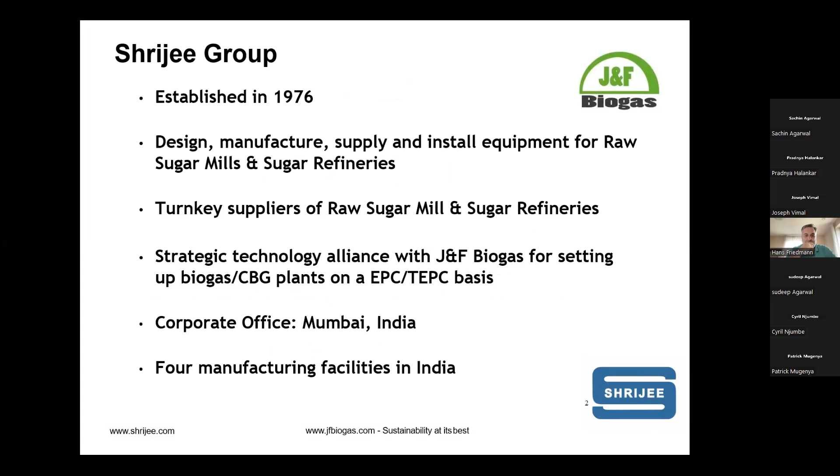So I would just give a short agenda of this presentation, like what would be the kind of this presentation flow, just to give you an idea of what we'll be discussing today. So we would start with the basic introduction about what J&F is offering in terms of technology, and also a little bit more to keep it very simple on the basics of biogas.

For example, starting with the Satat scheme. Satat scheme is something which has been introduced into India for setting up these biogas plants by entrepreneurs and sugar mills. So I'll go through some details on the Satat scheme, and also what are the different feedstocks which can be used from the sugar industry and the non-sugar industry for setting up these biogas plants, and also a little bit on the gas yields, what would be the gas yields from different feedstocks.

And also on different components which are in biogas, because biogas in India is not something new, but we have not had many industrial scale biogas plants. We had small gobar gas biogas plants in India in the past 40, 50 years, but to scale it up to an industrial scale, there are different sets of components and skills needed when setting up this biogas plant. So I would also go through these different components in the biogas plants and what are the technologies involved in this and so on.

So first, I would start briefly by giving a short presentation on the technology, what we are offering here in cooperation with Shrijee here in India. So we call it something called a semi-dry fermentation technology.

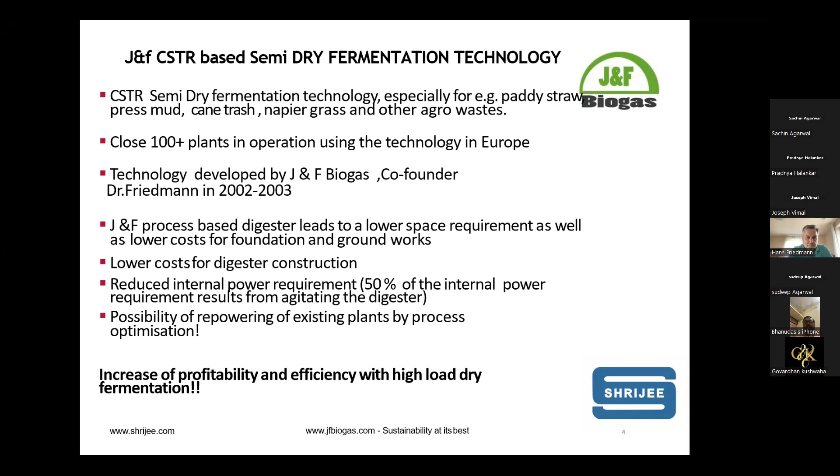So I would not go much into the technology part for now. I would move on to more practical issues, what is currently available in the market in terms of the scheme. The Satat scheme, as some of you would have known, stands for Sustainable Alternative Towards Affordable Transport. This was launched by the Indian government back in 2017-2018, and with some amendments it has been reintroduced in the current year, 2022, with the central finance reintroduced. This was the scheme which the Indian government introduced for entrepreneurs and sugar mills to set up compressed biogas plants, where investors or operators can set up these biogas plants and sell the biogas or CBG to the oil marketing companies.

There is something called central financial assistance, or CFA, for setting up these biogas plants. I'm just giving an idea of what the scheme is and what the advantages or contents of this specific scheme are. If there is a sugar mill, an investor, an independent operator, or an energy company who wants to set up a biogas plant, the central government via its responsible agencies is offering close to 4 crore Indian rupees for setting up a plant with 4.8 tons output of CBG, or 4,800 kg. In terms of press mud, the size of the plant would roughly be 125 tons of input press mud capacity per day, which produces around 4,800 kgs of CBG, for about 4 crore Indian rupees.

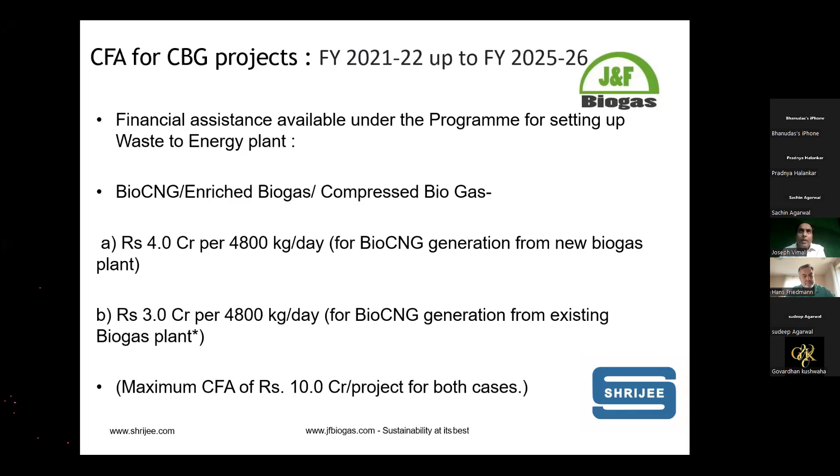When it comes to existing biogas plants where you can generate biogas and convert that into CBG, they are giving around 3 crore Indian rupees for setting up such plants. The maximum central finance currently available in India is around 10 crore Indian rupees, that's around 1.3 million US dollars, for our international participants to know. I'm sure other countries also have similar biogas policies with central financial assistance that can be used for setting up these plants.

When it comes to gas offtake, that's one of the important things - once you set up a biogas plant, how do you sell the gas generated? Most of us in the sugar industry are used to ethanol being sold or taken by oil marketing companies. So the government has made a provision where oil marketing companies would be involved in buying the gas from producers of CBG, whether it's a sugar mill or independent operators. They set up a pricing slab for buying at different prices based on the nearest CBG, or let's say CNG, station. So they benchmark the CBG price against the CNG station price.

CNG, compressed natural gas stations, are quite common in most parts of North India, like UP, Delhi, and Haryana, and now it's getting more popular in the South as well, where a lot of gas pipelines are being set up. So the government has benchmarked the sales price against the sales price of CNG. You can see that the base price, including GST, is around 56.7 Indian rupees for sale offtake of this gas.

Depending on the CNG price, as I said earlier, the price kind of increases. The formula is that roughly they are offering 20% lesser than what is there at the nearest CNG station. There is also pricing offered based on distance - if the CBG plant is far from the sale point, there's pricing based on this specific criteria as well. This is something the government has reintroduced with refinements to encourage more entrepreneurs to set up these plants in 2022, and all interested investors should make use of it, because as of today this exists - the subsidies would exist until 2025-26. So the first movers in the market would be able to take advantage of this specific assistance.

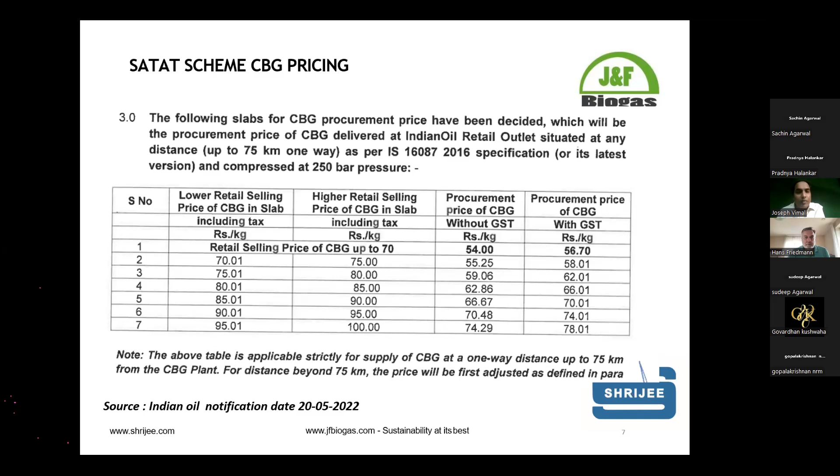Next, I would briefly go through the different feedstocks which are used for biogas, like cane leaves, paddy straw, pressed mud, napier grass, and bagasse.

These are common feedstocks available. Of course, each feedstock has its own characteristics when it comes to digestion. They have their own gas yields, and their own type of characteristics which give the corresponding gas yields.

In the sugar industry context, cane leaves and pressed mud can be used, and bagasse can also be digested, but bagasse is slightly more challenging compared to pressed mud or cane leaves because of its lignin content. So the low-hanging fruit in the sugar industry would be pressed mud, and cane leaves are also something which can be explored, since a lot of cane leaves are left behind in the fields post-harvesting.

And paddy straw is something, as we all know, that in India causes a lot of pollution issues in Punjab, Delhi, and Haryana regions during harvesting time at the end of the year, in November and December. So paddy straw is also being used as an interesting feedstock currently by many investors who are setting up large-scale biogas plants.

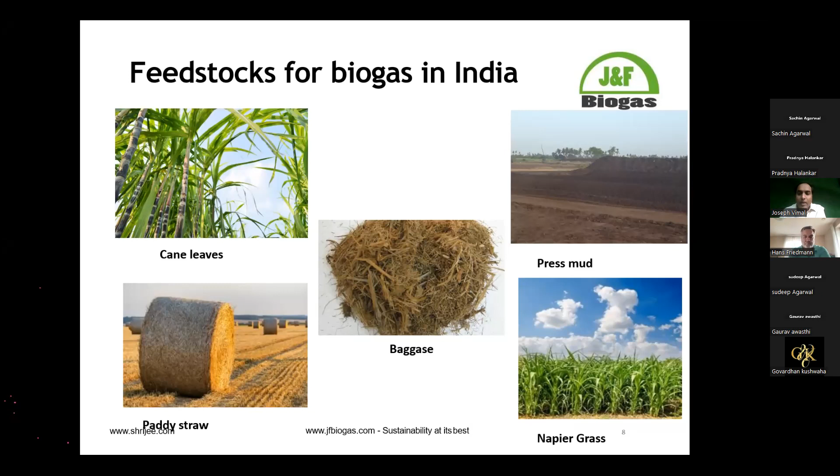So now I would just jump into explaining a very basic anaerobic digestion process. How does the process work? Most of us know how the process works, but just for the audience who are perhaps new to biogas, let's go through how digestion happens and what end products are obtained post-digestion.

So any organic matter, depending upon its nature, can be used for digestion purposes to generate biogas. So livestock, cattle dung, energy crops, waste from STP sewage plants, hotel and restaurant waste, supermarket waste - of course the industrial waste we are discussing today would be more on pressed mud and cane leaves. And different kinds of energy crops and other substrates can also be used.

So even co-digestion can be made in a single digester. But the most important first step is to understand each feedstock and analyze its characteristics - what are the characteristics in terms of dry matter, organic dry matter, digestion capacity, and so on.

So digestion is basically a fermentation process. It has, of course, in industrial scale, many mechanical components like agitators, mixers, heating systems, and other components involved in an anaerobic digestion process. We will go through some of these components in detail at a later part of this presentation.

So the gas generated - raw biogas - has a methane percentage around 50 to 55%. It depends upon the feedstock, and each feedstock has a specific biogas yield. Then there's CO2 and other components. So based on the requirement, if you're generating heat for thermal applications, or using it for electricity generation, or in our case, in the Indian context, biomethane is a more interesting aspect currently being used. And it can also be injected into the gas grid.

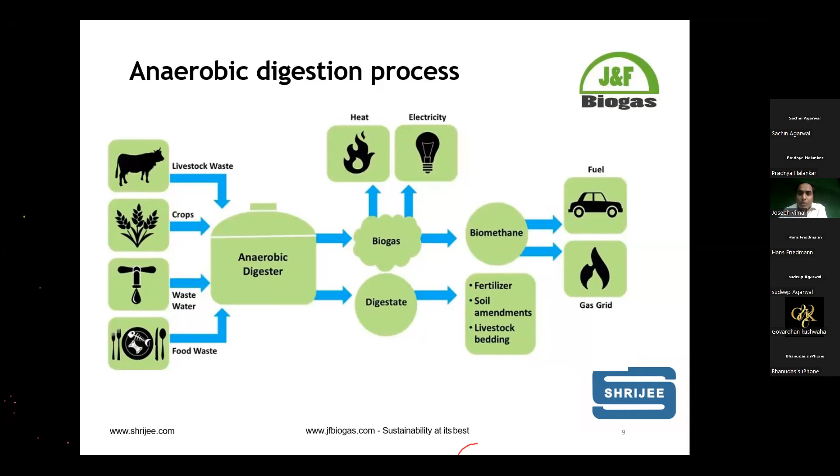Even if you take pressed mud, there are different quality pressed mud analyses we have come across in India and also in other countries. So it's very important - the first thing is to do standard testing of the characteristics, followed perhaps by a biomethane potential test, to determine the exact biogas yield before starting a biogas plant.

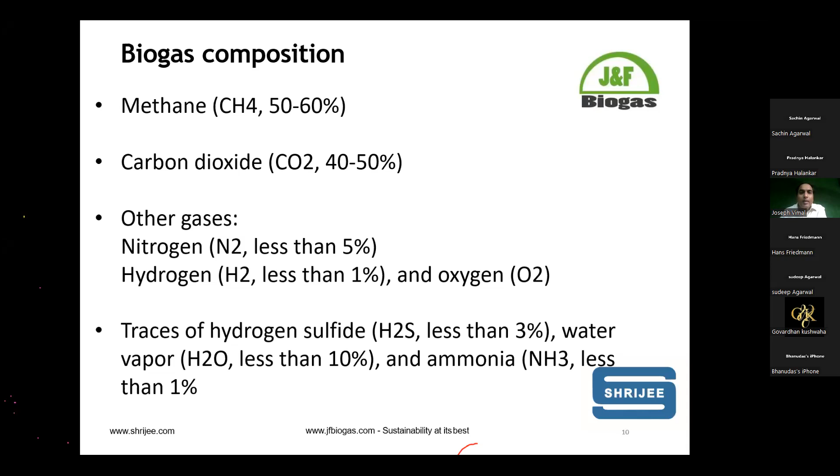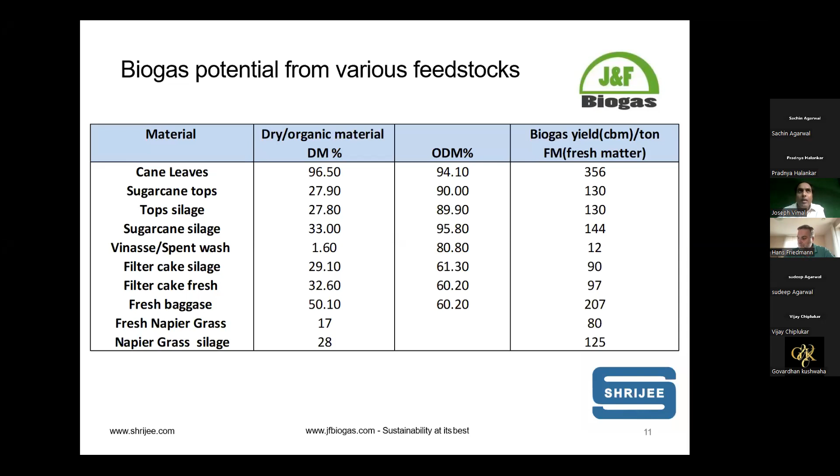And then filter cake, fresh filter cake and filter cake silage also has been tested, and you can see the gas yields here, and what are the different gas yields being used here. We have also tested bagasse under Brazilian conditions, and most of the numbers here we have also worked on with Indian numbers. In Brazil, some sugar mills are a little less efficient, so the gas yield is slightly lower, because when the sugar mills are less efficient, the gas yield also changes correspondingly.

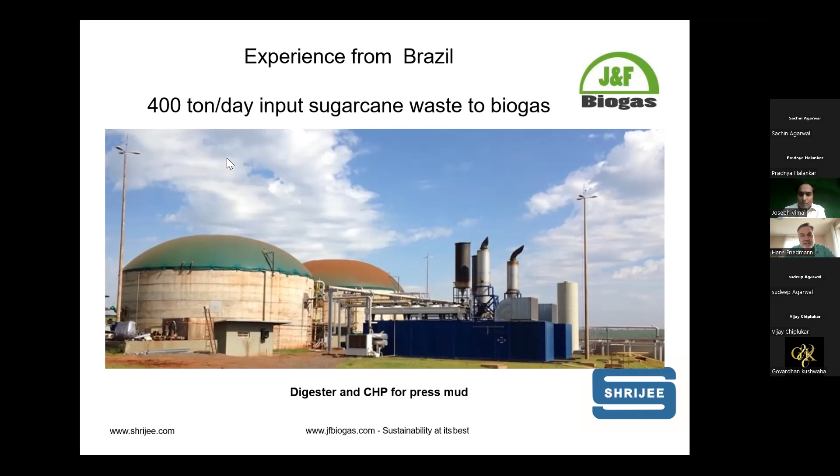Could you take the next slide? We tested the filter cake, the press mud — in Brazil it's called torta. We made some tests with bagasse, with vinasse, with cane leaves, and even with a mixture of these feedstocks in this wet digestion plant. To be honest, the mixture failed. It was very difficult to handle all these different materials on account of the difficult viscosity in the digester.

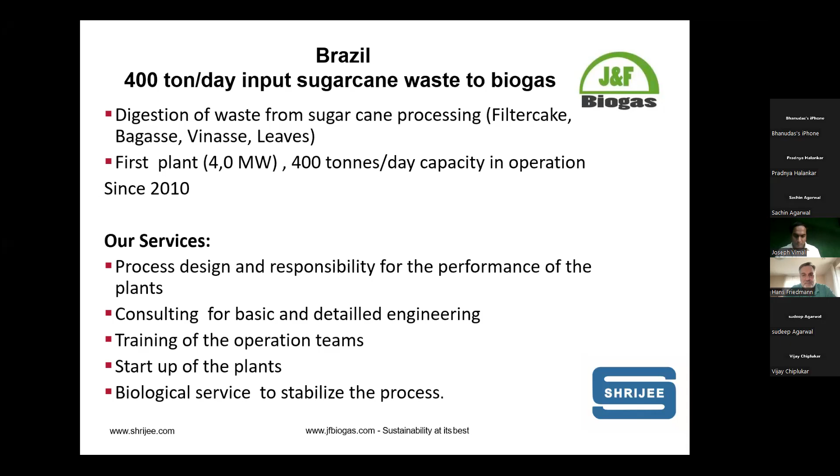We made the design of the plant, of the process. My job was to train the team in the operation of the plant and to help in the startup and the biological service of that biogas process. One point was that the process needs micronutrients to work in a stable way, for example. Next slide.

Joseph, would you like to go on? Okay, sorry, it was on mute.

So the next slide would be on the co-digestion of sugarcane industry waste, because we always have so many questions in the Indian sugar mills about what would be the combination, what kind of feedstocks can be used for co-digestion as well. Based on the past experience and also looking at the feedstock analysis, substrates like press mud and cane leaves can be co-digested, because these are more on the dry matter side — for example, press mud is more than 25% and cane leaves also on the higher side. So these are both, you can technically term them as solid feedstocks, and the solid feedstocks can be used together.

We also see many cases where there are common inquiries on how press mud and spent wash can be co-digested together, what would be the process, what would be the end result, and so on. So our experience, mainly from Brazil on the technical part, is that it is feasible to mix press mud and the vinasse, or the spent wash as we call it in India, considering the gas generation and all those factors.

In the Indian context, one of the challenges is mixing press mud and spent wash. There are certain pollution control norms for disposal of spent wash, and as we know from the sugar industry, the pollution control board is very stringent about spent wash disposal, even from the distillery. Once you combine this, there are regulations and disposal guidelines which have to be followed, so that is one thing to be addressed.

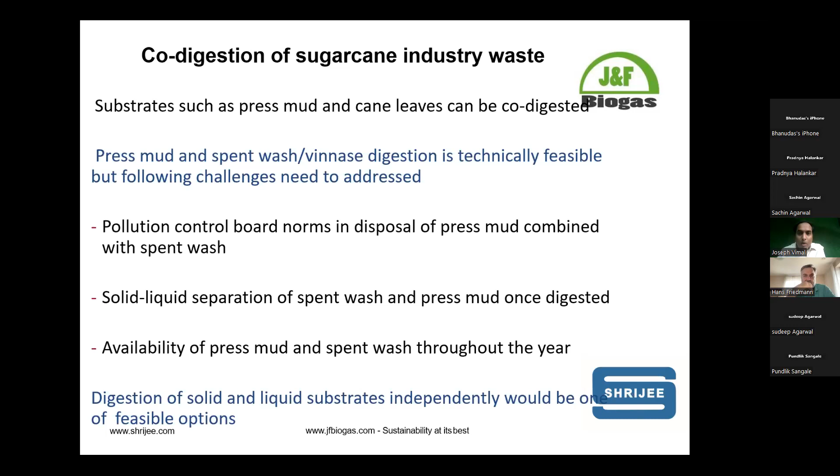We don't mix it with water and pump it into the digester in a specific ratio. In our specific process, we prefer to take the press mud directly into the feeding system in solid form and then into the digester. The digester has a gas holder on top for gas collection, and it also has agitators inside, which we'll show in following slides. Then we have other components like instrumentation, electrical, and everything else, which comes as part of the package.

Post digestion, we have the digestate, which comes out as organic manure. The raw gas typically has hydrogen sulfide and CO2 present. So for making CBG, compressed biogas with high purity methane, we need to remove the hydrogen sulfide. The hydrogen sulfide in press mud varies depending on whether the sugar mill uses a sulfitation or non-sulfitation process—it can range anywhere between 500 to 5,000 ppm.

Based on the characteristics of that specific mill, a suitable hydrogen sulfide removal system can be designed. Then you have a CO2 scrubbing system following the hydrogen sulfide removal, because hydrogen sulfide is highly corrosive, so we need to remove it before the CO2 scrubbing system. There are about 4 to 5 different technologies which can be used for CO2 scrubbing—we'll go through this briefly in a following slide.

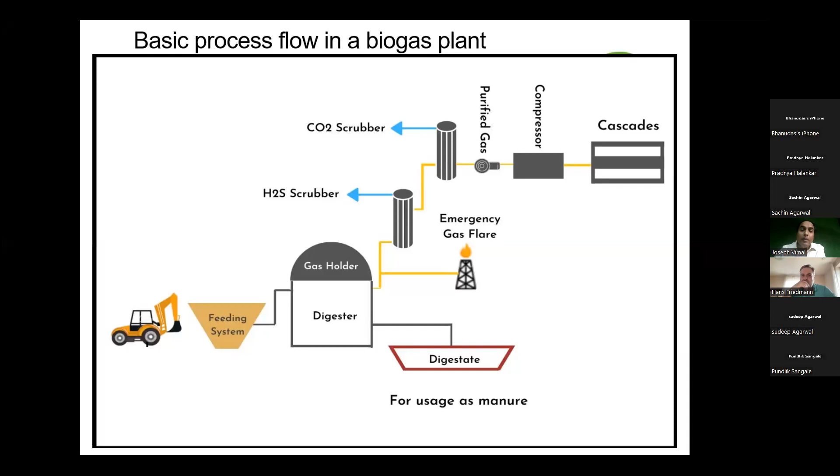The next slide is very important because we get questions on this: our sugar mill runs only for 120 to 250 days. How do we operate the plant? The sugar mill crushing season typically varies between 120 to 250 days across the world, just as an average number. But biogas plants need to be operated for 365 days in a year, starting from the season until the end of the season and during the off-season as well. This is a continuous biological process, which means the biogas plant has to be operated year-round.

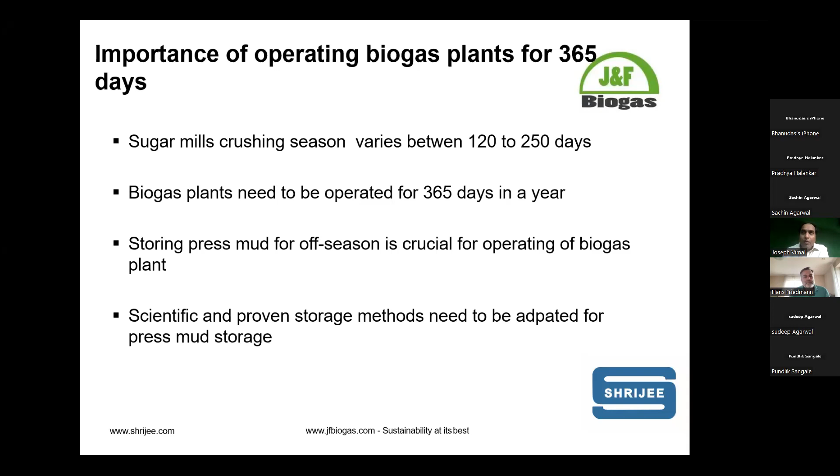So it's very important to store the press mud for off-season operations. We get questions on how do we store press mud, and how can it be stored?

What you see here is a press mud storage yard from Brazil, used for storing the press mud. Here you see different compartments or bunkers with partition walls, and the press mud is compressed using small tractors and vehicles for compacting it, so no reaction happens. Before setting up a biogas plant using press mud, a storage yard is one of the important key infrastructure pieces one should have. It's an additional investment, but it's an investment for the lifetime of the plant, 20-25 years. The storage yard is typically made with an RCC base, or asphalt can also be used depending upon the feedstocks. The right storage method is very important for maintaining the gas yields.

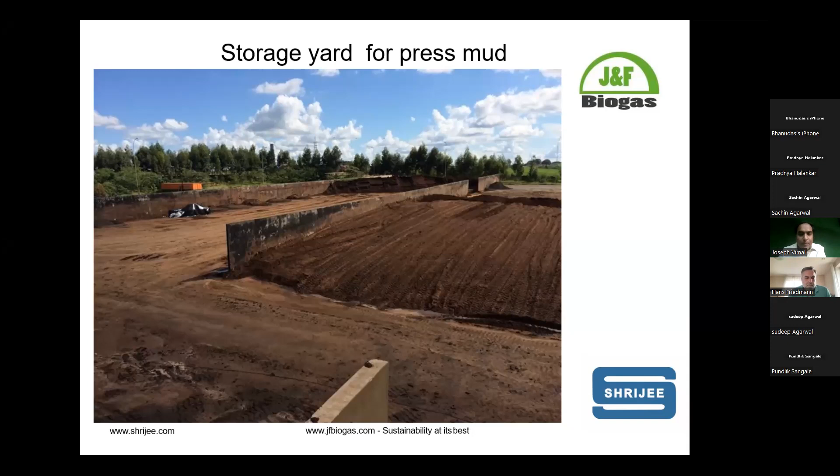This is another storage yard picture from Germany, where maize is stored. Germany has a lot of experience storing different feedstocks, especially maize, because maize is used as an energy crop and is harvested only for one month in a year. During the rest of the gap, they need to store it and operate with it for 11 months. So there's a lot of know-how and experience in storage that we could also learn from German plant operators.

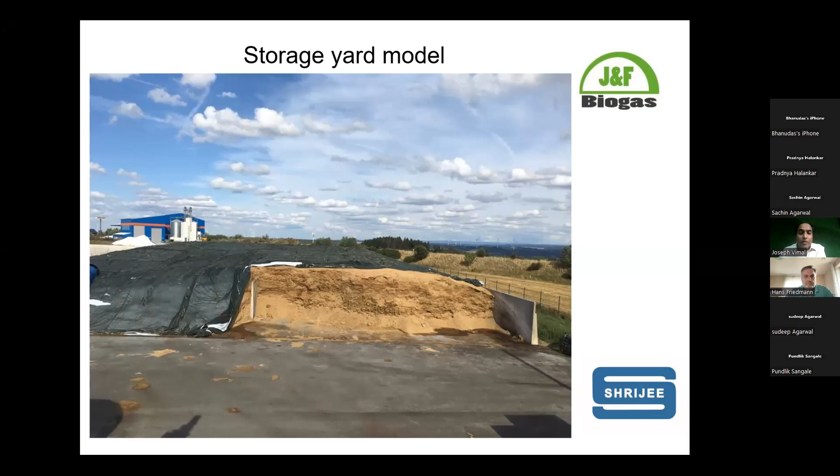Another thing we always get questions on is what is the gas yield from press mud, and how do we determine this gas yield? The gas yield per ton of press mud depends upon the following factors: the organic dry matter present in the press mud is one of the important key factors for these calculations, theoretically as well. And the type of storage method used, because if you don't store it properly, there's a high chance the gas yield will be much lower than your actual potential yield.

That's the reason we wanted to share the storage methods used across the world. Also, the efficiency of the sugar mill matters—as most of you know, the more recovered sugar you extract, the less sugar or sucrose is left in the press mud for further processing into biogas. So if the mill is slightly older and the process is a little inefficient, you could get slightly more gas. Also, the most important thing is the digester's biological process—it all depends on the operator and the technology provider, how the digester is designed, how it's operated, and how the whole process works. That is also one of the key factors for gas yields.

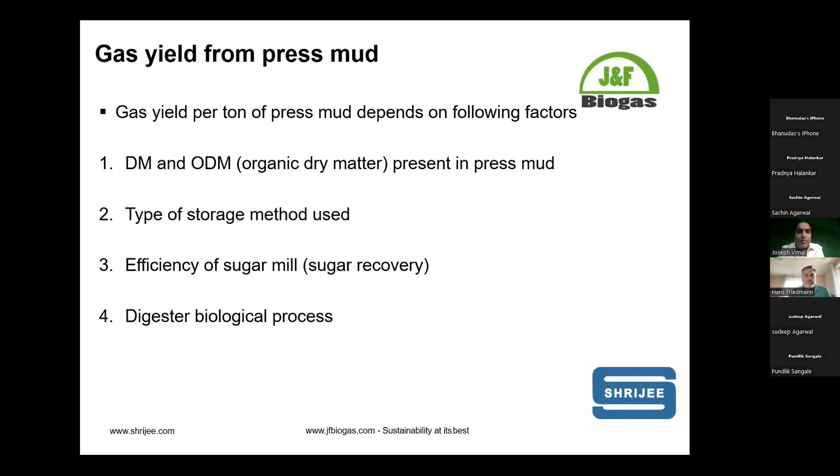We will also briefly go through why CSTR technology is suitable for solid substrates. CSTR is nothing but a continuous stirred tank reactor, where there is continuous mixing happening inside the digester using mechanical agitators. This mixing is very important for solid feedstocks—it's crucial for mixing and maintaining homogeneous conditions consistently inside the digester, and it also prevents sedimentation from solids settling down over time. That's why the mechanical agitator mixing system is very crucial. For example, close to 9,600 biogas plants in Germany operate based on CSTR technology, using mixing or mechanical agitators inside the digesters.

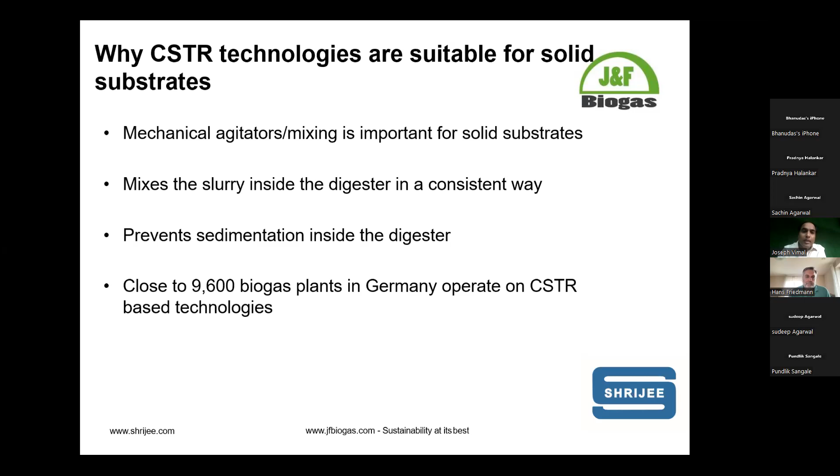So these are some non-press mud based, sugar based feedstock examples as well, just to show that even other feedstocks might be useful, since there might be participants from non-sugar based industries too. So I would let Dr. Hans

I was operating this waste processing biogas plant for 10 years. We processed waste from the city of Berlin, a very crazy mixture of feedstocks, like source separated organic waste of the municipality, slaughterhouse waste, supermarket waste, all the packed food that couldn't be sold in time, chicken blood, and a little bit of cow manure. In total we processed on average about 40,000 tons of waste per year. I was operating this plant from 2001 to 2007. That was the plant where I really learned how to handle difficult feedstocks.

The second picture, thank you Joseph, next slide please. This plant is my own plant. It's a monofermentation of silage in a region in north Bavaria. The ground level is about 600 meters above sea level. Maize doesn't grow there; it's too cold in spring, so we use triticale and grass as feedstock, in the form of silage of these materials.

It's a dry fermentation plant with a mixer, a very small digester with very high load. That was my specialty, to be able to handle the feedstock in a small digester with a very high organic loading rate. This plant has a heat grid to supply an industrial area there with heat, and the electricity is sold to the grid.

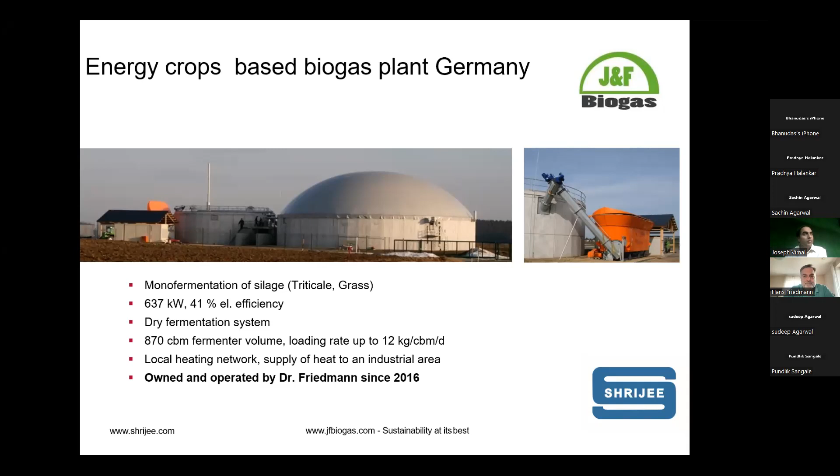We designed the plant, we constructed the plant. I'm still consulting the client up to now and supplying the company with micronutrients.

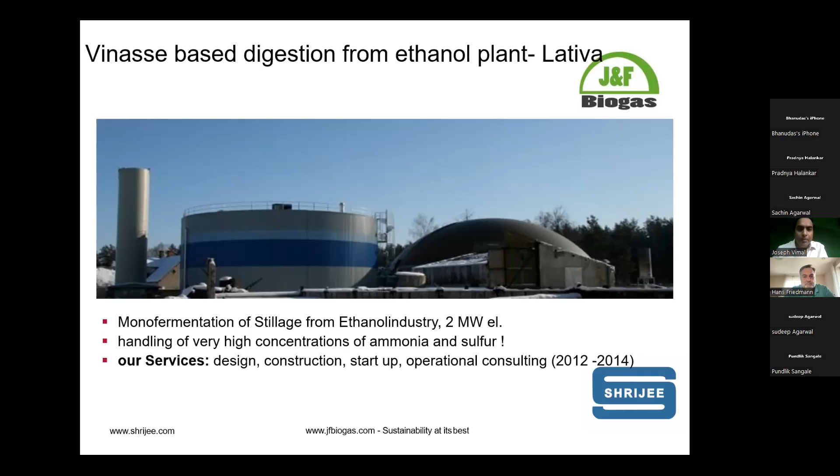Thank you, Hans. So now we go to the last part of the presentation, which should be more on the components used in a biogas digester. The idea of this section is to visualize the typical components involved in a biogas plant, which includes also the feedstock preparation process.

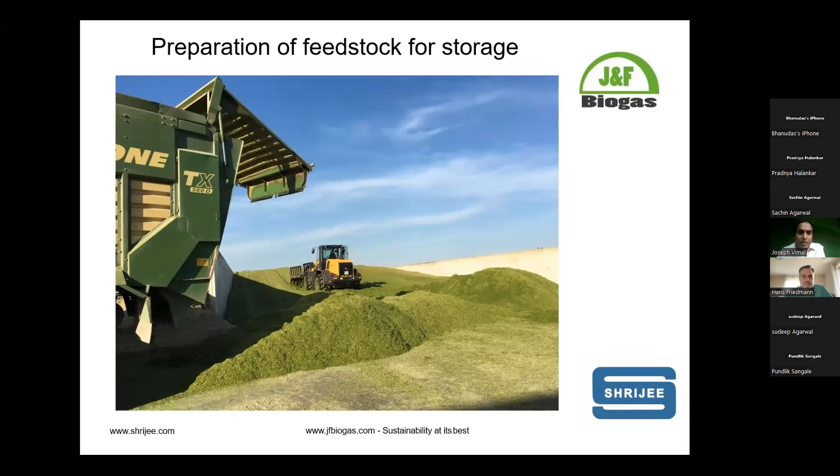So in the first slide, what you see is feedstock preparation happening, how the feedstock has to be stored during harvesting. For example, this is a maize-based plant. Similarly, we have to store the press mud and compact it, using the right storage process. Then we have the feeding system.

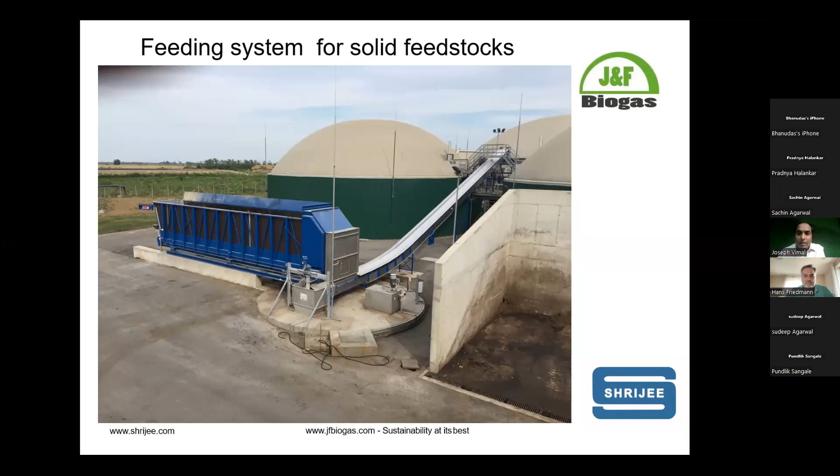What you see are the biogas digesters. The green colored part is the insulation provided for heating, because in some countries insulation is required to prevent temperature losses. What you see on top of this tank is a double membrane gas holder for gas collection. The gas is collected at the top.

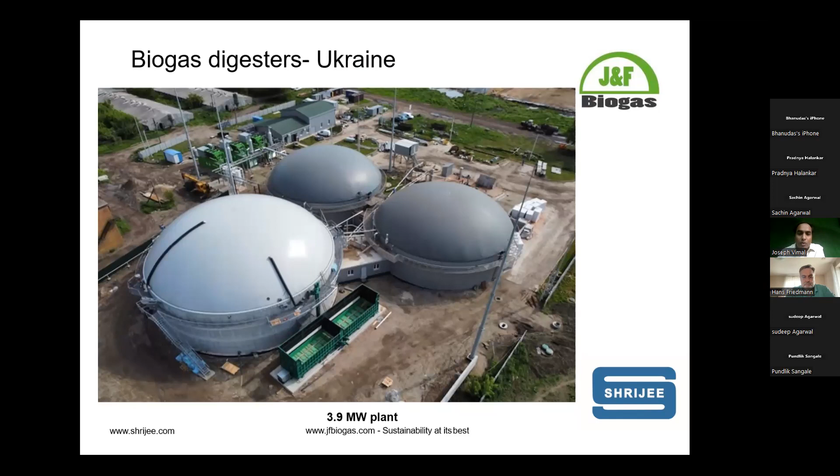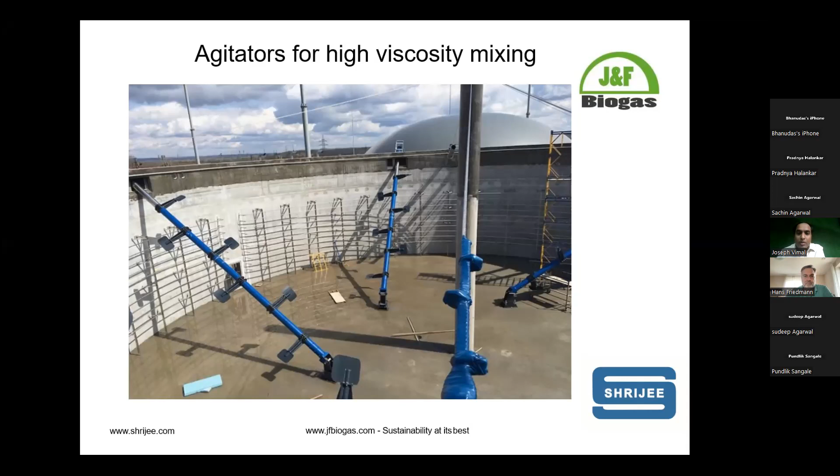This is more critical in European conditions because of the weather, but even in Indian conditions, in certain regions in the north, we need to maintain the temperature especially during winters. Gas production should not come down, so we use steam for heating the digester. The mixing systems are used for mixing in a consistent way. In our case, we use a high viscosity mixing system, specially made for semi-dry fermentation, which is able to mix even higher viscosities consistently.

This is almost the same picture. You can see the heating system, and there is a center pillar between the tank, in the middle, used for holding the gas holder. On top there are two membranes, one for storing the air to give it shape, and air is consistently maintained there using a blower. The inner portion shows these membranes, but that's how it works.

You have a couple of membranes on top to prevent them from falling onto the slurry or liquid inside. Some ropes or strings are given inside so they don't come in contact with this liquid.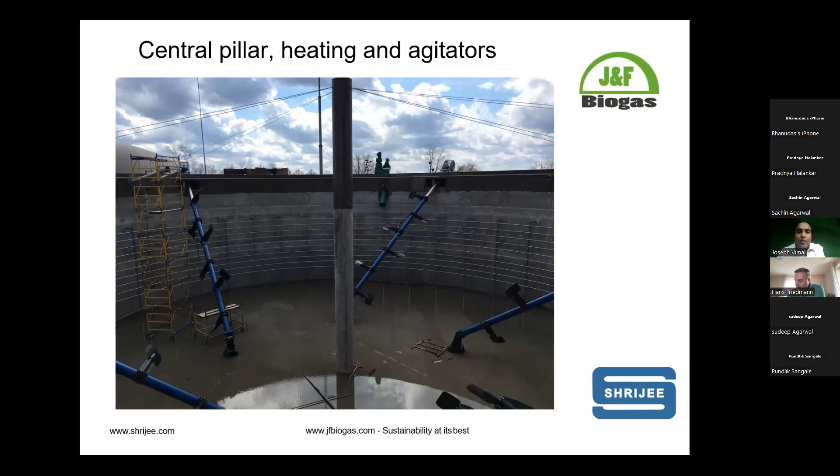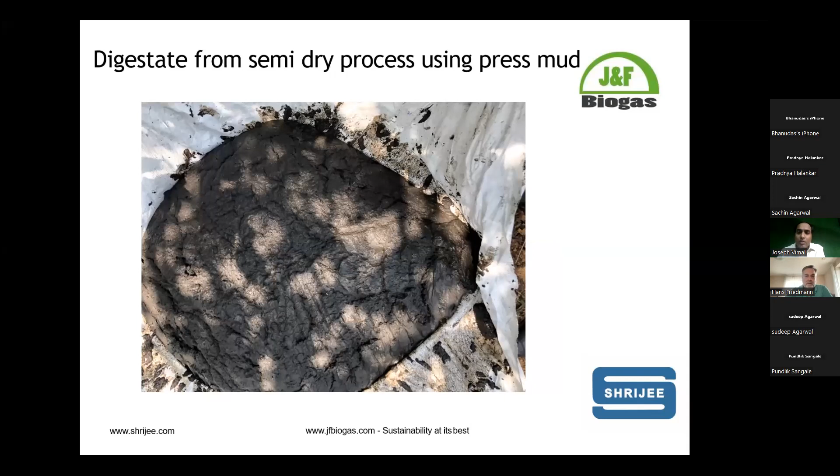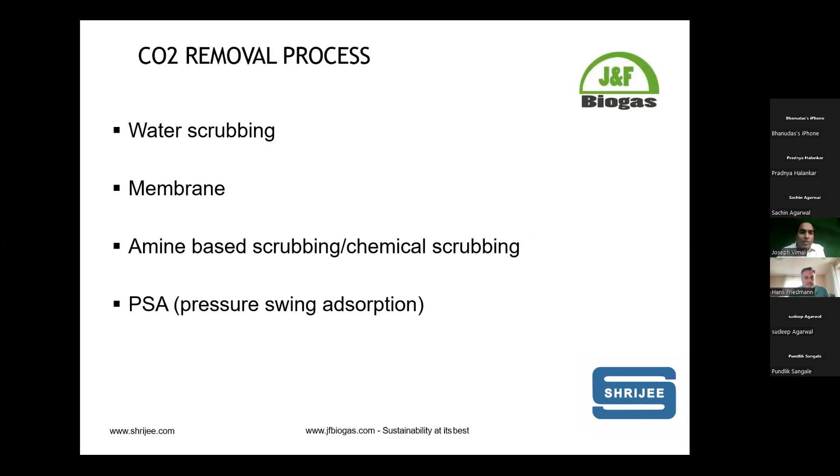The final thing would be CO2 removal, because once we have the biogas after digestion, the next step is removal of hydrogen sulfide and CO2. For hydrogen sulfide, you can use chemical, biochemical, or biological scrubbing systems. CO2 removal can be done by water scrubbing, membrane-based scrubbing, amine-based scrubbing, and pressure swing adsorption. Each technology depends upon the location and available resources like heat and water, so it can be finalized based on the specific location of the plant.

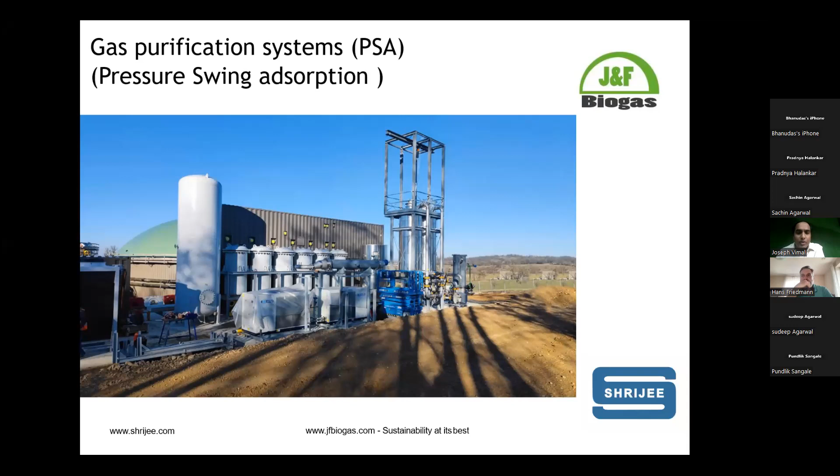So just some pictures of how a typical pressure swing adsorption system would look like. The concept is based on pressurizing the biogas into a molecular sieve type media, and then depressurizing to remove the CO2. Pressure swing adsorption is one of the commonly used technologies across the world, and it's independent of using water technically, and weather conditions would not affect it in general. Also, membrane-based purification has been in the market in the last few years.

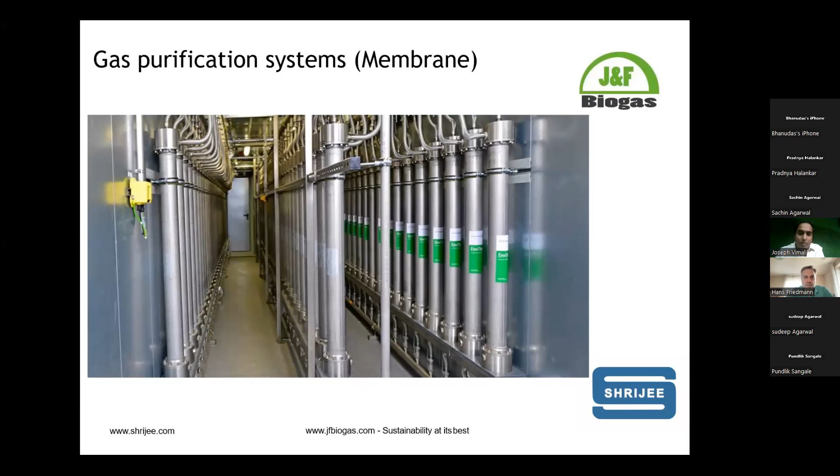It's getting a little popular because of the compactness and the container being used, but the lifetime of the membranes is something that also needs to be looked into. Since it's a new process, it works on the concept of passing the gas through specific membranes, where methane and CO2 are separated in a way based on the membrane quality. You have methane being separated and CO2 separated as a permeate gas as well.

So then you have the final project specifications. Typically there might be questions on what is the typical size of the project, and what are the area and manpower required. So we have one slide saying what would be the typical plant size under Indian conditions which could be economically viable - a 200 TPD press mud plant to generate around 8 tons of CBG. Again, it depends upon the quality of the press mud, so we are just giving a ballpark number here.

This would require an area of around 10 to 12 acres of land overall, which includes the press mud storage, the equipment, and the manure storage. Equipment per se would not take more than 1 acre of land, but it's more about the storage, and the post storage is what is important.

We also have plant automation for monitoring key parameters, because this is very important. Under the central finance scheme, the plant has to be automated using a SCADA system, which we understood recently, because it's important to capture data for MNRE or subsidy agencies to see the optimal performance of the plant, since subsidies are subject to the plant operating according to the proposed capacity. So automating the plant is crucial for various factors, not just for MNRE's sake, but also for operations and recording data.

When it comes to the timeline, a biogas plant from start to end can be completed between 12 to 14 months. Post commissioning, the plant needs some time for stabilization. When it comes to manpower required, it would be between 10 to 12 people for a very good, efficient biogas plant of such capacity.

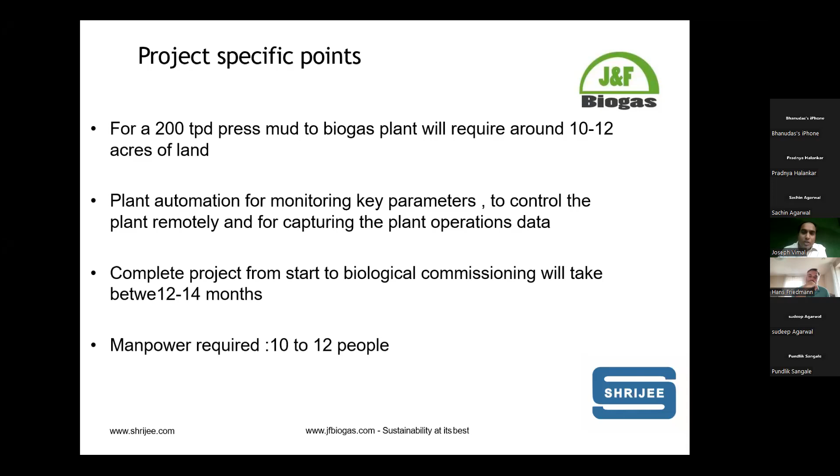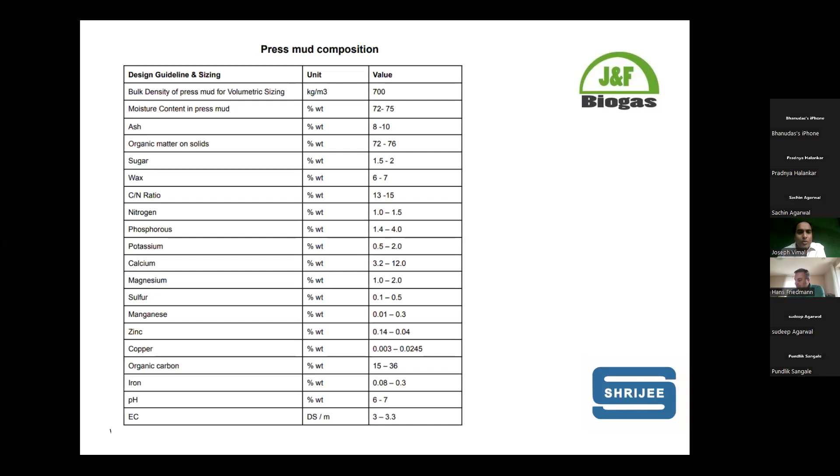This slide is more on the characteristics of the press mud, because we keep insisting that sugar mills looking to set up biogas plants should look into the press mud characteristics and get basic data from a nearest lab. Most labs are capable of doing this type of test. This is what your financial and economic viability will depend upon - the per ton of gas you would be able to generate. So it's very important not to make assumptions based on what some vendor or other client is saying; it's better to test it yourself, because from our experience the gas yield varies a lot from sugar mill to sugar mill. These are the basic parameters one has to test, which a standard laboratory would be able to do.

As Mr. Sachin already explained, our cooperation with Shrijee and how the model is working - Shrijee has a licensing agreement with J&F Biogas for the digestion technology. As you all know, Shrijee has been in the industry for many years, executing boiling houses and sugar mills in various countries. So this is our typical project execution model, where Shrijee will be doing the EPC and front ending, and J&F will be offering the technology and supplying some critical components for the biogas plants.

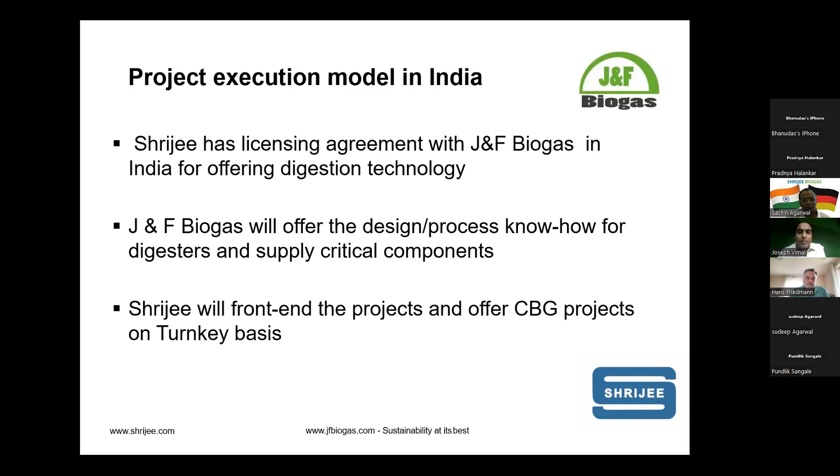So that was about the presentation, and we would like to once again thank Shrijee for organizing such a wonderful webinar, and we would be glad to take questions post this presentation as well.

Thank you, Joseph, and thank you, Dr. Hans. That was very informative. There are a number of questions in the chat box, and I don't know how much time we have, but Joseph and Dr. Hans, please go ahead, try and do your best. Joseph, do you want to start? Yes, I would jump into some of the questions. If there are some questions anyone is able to pick, we could do that too.

So the question from Bojraji is, how much power is needed to start a 100-ton press mud plant? I think he's more asking about the OPEX or power required. For operating a 100-ton press mud plant under Indian conditions, including CBG, you would require around 300 to 350 kilowatts per hour of power, including purification, compressors, and everything. So that's the ballpark number for the capacity or power required.

Then I would jump to a few other questions. This one is from Mr. Gautam: In grain-based distilleries, most people don't use biogas - can we do it in a grain-based distillery? Please guide for an 80 KLPD grain-based distillery. So in this case, grain-based distillery - we can do that in a grain-based distillery, but we need to know the volume of the effluent coming out of the plant. But it is feasible to do in a grain-based distillery.